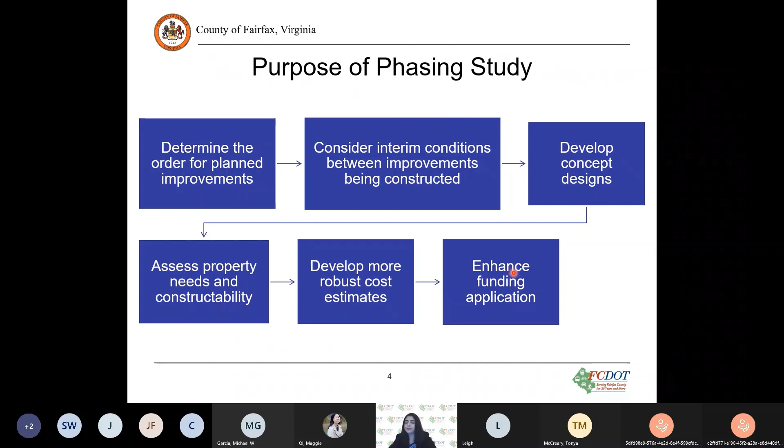The process and the steps we developed to conduct the study to determine the order of improvements include assessing and evaluating typical travel conditions in the area for vehicles, pedestrians, bicyclists, and transit users. With the pandemic and the resulting significant change in the travel pattern and volumes, we did not collect field data, but used the available data from VDOT and Arlington County from the 2018 and 2019 timeframe, and used StreetLight data to supplement the available data to conduct the existing conditions analysis. This step was completed, and the findings were presented during the first round of outreach completed in February 2021.

The next step was to develop and analyze future build conditions through travel forecast models, with 2045 being the horizon year with all the improvements, and 2030 the interim year with some of the improvements in place. We presented our initial findings with 2030 analysis with possible first two phases of construction to the public in the second round of outreach, which was conducted in November 2021, and received feedback. And we continued to develop a phasing strategy with concepts while assessing the property needs and also considering some key elements, which included shifting vehicle travel demand away from the interchange, making major travel movements easier, and also considering constructability.

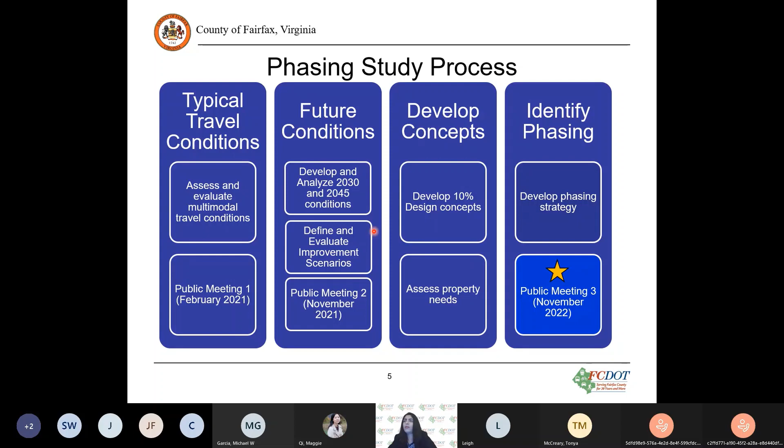There were a series of critical decisions we encountered through the study process as we developed and tested various phasing concepts, which became the building blocks that led to the next decision. Based on the different components of the recommendations in the comprehensive plan, we first identified the first phase, then adjusted the network to reflect travel demand and public feedback. Through the findings, we identified the next phase and whether the full build is necessary as recommended. Lastly, through public feedback, we assessed a 2-lane segment of the ring road where the comprehensive plan recommended a 4-lane configuration. The next elements of the presentation are built around these critical decisions made throughout the study process.

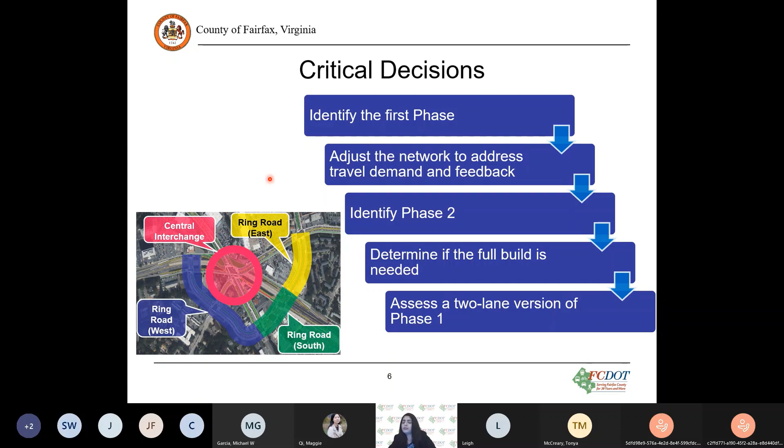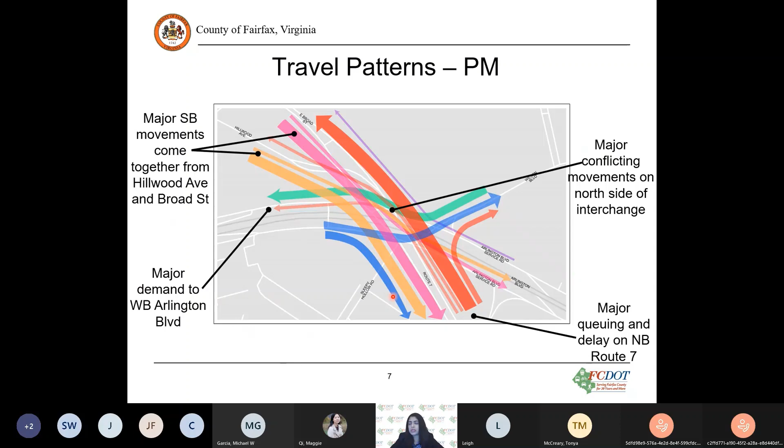Identifying a starting point, we initially looked at the travel patterns in the area, shown here for PM peak with more people traveling in the afternoon. We identified a few major movements through the interchange, in addition to the through movements along Route 7, including Route 50 eastbound traffic to Route 7 southbound and Route 50 eastbound movement to Wilson Boulevard.

Based on this travel demand, constructability, and considering previous efforts, focusing on the west side of the interchange along with potential residential impacts that would likely occur starting on the east side, we started our phasing considerations on the west side, with the ring road connecting Route 7 in the south to East Broad Street in the north, terminating at East Broad Street as our first phase, and extending the ring road between Route 7 and Route 50, simplifying the central intersection connecting Route 7, Wilson Boulevard, and Sleepy Hollow Road as our next phase.

While testing these phases, the results of the travel analysis with reconfiguring the central interchange showed that the network would experience significant congestion, largely due to the Route 50 and Wilson Boulevard traffic being diverted to Sleepy Hollow Road and the Ring Road with multiple turns.

At the same time, City of Falls Church provided feedback that they did not want the Ring Road to enter the city, impacting their property, and also wanted to avoid more traffic shifts to Hillwood Avenue. Considering this feedback, we removed a portion of the ring road north of Route 50, while making a decision to test a scenario with the Route 50 and Wilson Boulevard connection where the travel demand is high.

We also looked at potentially relocating the transit center, considering the issues with the grade at the current location, along with adjustments to the ramps with this new ring road.

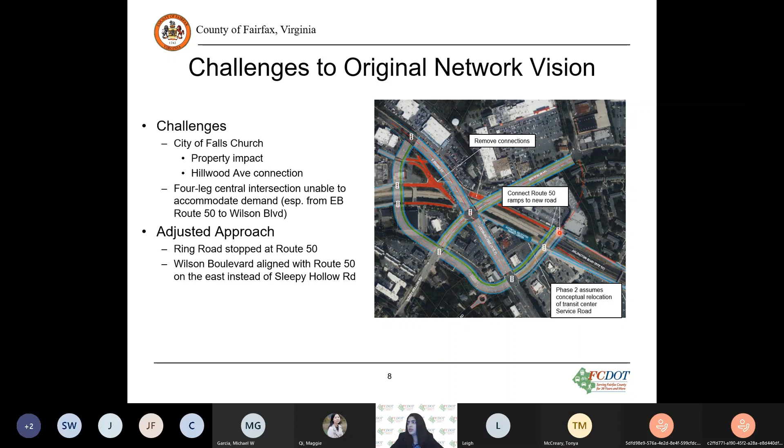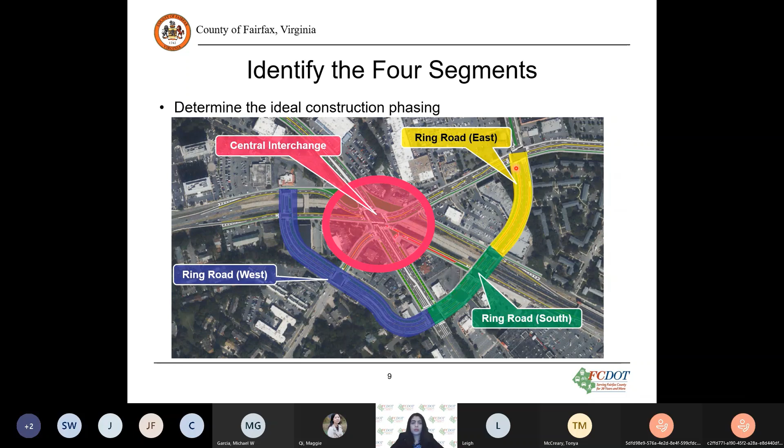Through a significant amount of analysis and feedback, the early phasing was relatively clear that phasing should start on the west side, but the phasing of the next set of improvements was not yet clear. The independent segments to consider were identified as the ring road in the south between Route 7 and Route 50, the ring road extension in the east between Route 50 and Wilson Boulevard, and reconfiguring the central interchange.

This is the revised layout of phase 1, with the ring road between Route 50 and Route 7, with the northern portion of the ring road removed based on feedback from City of Falls Church. This segment includes 2 travel lanes in each direction, a 2-way cycle track on the east side, and sidewalk on both sides of the roadway with landscape panels.

And with the shift of the bridge over Route 50 a little to the west, and adjusted ramps to and from Route 50, the analysis results showed improvement in operations, adding this segment to the network as many movements centered on the interchange area shifted to the ring road, also significantly improving delays along Route 7. Outside the central interchange area, the intersections operate with reduced delays, and this segment was advanced as part of the recently submitted smart scale application for VDOT funds.

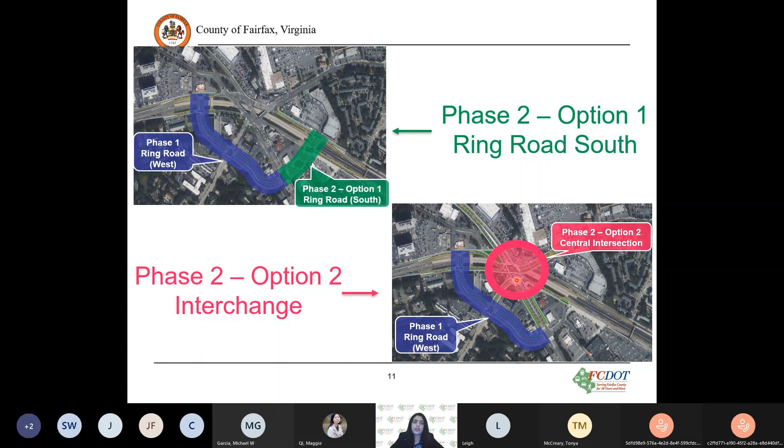To test the next phase, we looked at either extending the ring road on the south side, referred to as phase 2, option 1, or reconfiguring the central interchange to connect Wilson to Route 50 ramps and Route 7, referred to as phase 2, option 2. I'll be going over these concepts in the next few slides.

Phase 2, option 1, will include extending the ring road on the south side with bicycle and pedestrian facilities, along with an exclusive BRT lane for bus rapid transit, with possible extension to Roosevelt Boulevard in next phases to connect with East Falls Church Metro Station. This segment will also include new and adjusted ramps to and from Route 50. This phase, with the ring road extension, continued to help improve network performance, particularly at the central interchange, with more traffic shifting away from it.

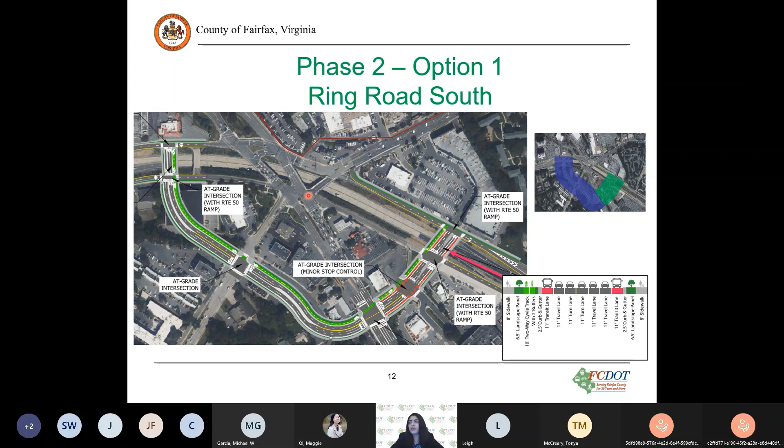As part of making a determination for the second phase, we looked at improving the central interchange area instead of the east side extension, which is our phase 2, option 2. This includes the connection between Wilson Boulevard, Route 50 ramps, and Route 7, based on the failing operations with Sleepy Hollow and Wilson connection as recommended in the comprehensive plan.

With this option of the interchange reconfiguration, along with phase 1, network performance degraded. A few reasons contribute to this: reconfiguring this intersection required additional signal phases and movements, like left turns from northbound Route 7 to the Route 50 westbound on-ramp, and from the Route 50 eastbound off-ramp to northbound Route 7. Also, removing the Hillwood connection from the interchange caused some impacts.

Another issue is the lack of connection for westbound Route 50 traffic to Route 7. This forces westbound Route 50 traffic to use Patrick Henry Drive south of this location to get onto Route 7, creating delays. So in general, congestion at this intersection spreads to adjacent signals, degrading network performance.

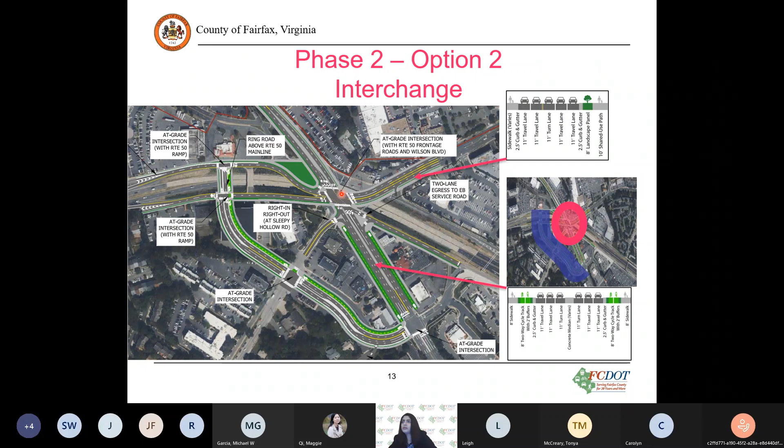Comparing the two options, 1 and 2, for phase 2, based on the analysis results, we saw that the ring road extension to the east side to Route 50 as the next phase helps the network become highly functional, enabling movements to shift away from the interchange and also facilitating constructability.

Comparing the options, we concluded that the recommended construction order for the first three phases is: the ring road on the west side between Route 50 and Route 7, followed by the ring road on the south side connecting Route 7 and Route 50, and third, reconfiguring the central interchange connecting Wilson to Route 50 and Route 7.

At this point, the missing piece from the comprehensive plan recommendations was the extension of the ring road from Route 50 connecting to the Wilson and Roosevelt Boulevard intersection. To analyze this segment, we considered 2045 volumes and analysis, starting by developing a set of baseline conditions. The baseline included completion of phases 1, 2, and 3, plus implementation of BRT in the area. The county comprehensive plan includes exclusive BRT along Route 7 and the ring road from Route 7 to Wilson Boulevard.

The BRT repurposes a travel lane on Route 7 into exclusive transit lanes, so there are two transit lanes and four through lanes. This phase 4 connection makes the last set of improvements proposed in the comprehensive plan, enabling better network performance across all modes. This phase showed modest improvements with analysis. Along Route 7, there are some delays experienced from Castle Road to Patrick Henry Drive, with a reduced number of through lanes from six to four to provide bus lanes for BRT.

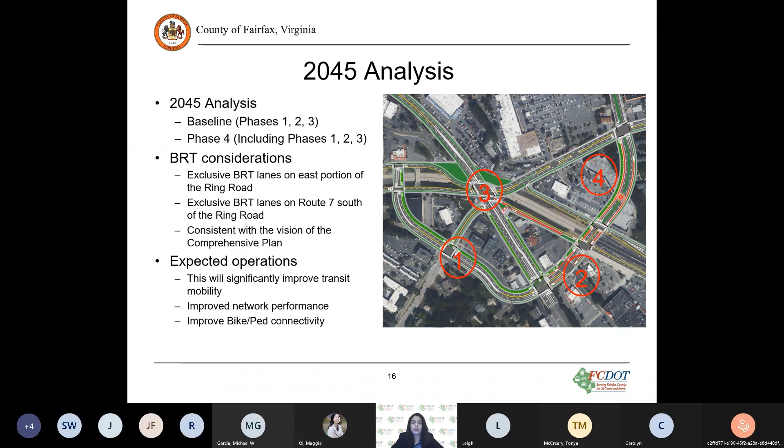This segment in general completes the network for accessibility, meeting active transportation needs and providing exclusive transit access. But considering the right-of-way impacts and this phase being such a long-term improvement, we will be evaluating the need for this segment as part of NVTC's Envision Route 7 BRT effort.

Here's a brief overview of the Envision Route 7 BRT study being conducted by the Northern Virginia Transportation Commission and how it's being integrated into our Seven Corners study. As high quality bus rapid transit is proposed from Tysons to Mark Center, the project envisions repurposing a travel lane to transit, or using an already programmed widening of Route 7 for transit lanes instead of vehicle lanes. Curb-running transit is proposed through Falls Church, shifting away from Route 7 briefly near Seven Corners to connect to East Falls Church Metro Station and returning to Route 7 north of Seven Corners.

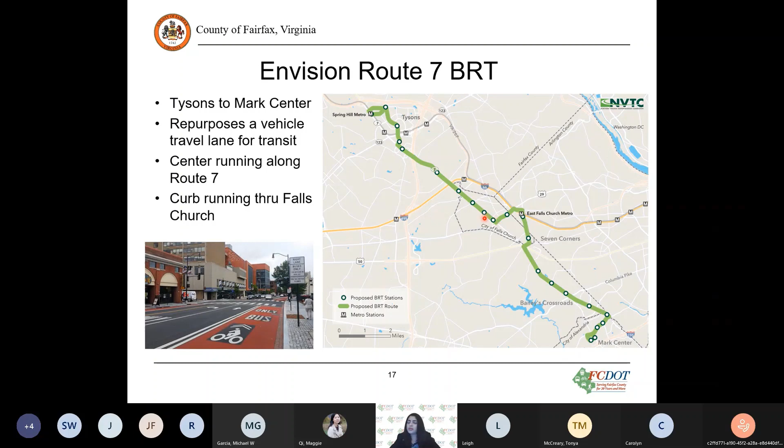Back to the phasing study, this shows the bicycle and pedestrian connections and how all the phases, through the ring road and central intersection realignment, will help prioritize these planned facilities in the interchange area, while improving access to adjacent facilities the county plans in the area, coming with redevelopment along Patrick Henry Drive, Willston Drive, John Marshall Drive, Wilson Boulevard, and Sleepy Hollow Road. These facilities will create a bicycle and pedestrian network enabling residents to access services and opportunities in the area.

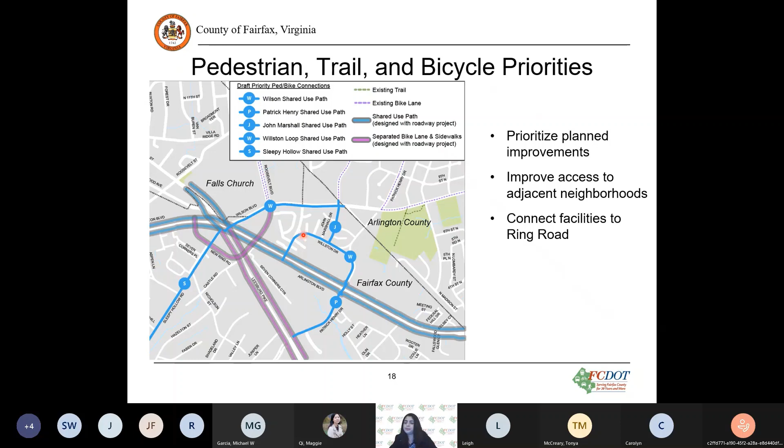As part of the feedback we received from the public during the previous round, we were asked about reducing the footprint of the ring road and making it a two-lane segment. So we tested this two-lane configuration for our phase 1 in 2030 for the ring road between Route 50 westbound on-ramp and Route 7, but with one travel lane in each direction.

Analysis indicated that delay is somewhat high along the ring road, but the network more broadly fails because travel demand cannot move as quickly as needed between Route 7 and Route 50 along the ring road. Queue spillback from the ring road on Route 7 to Patrick Henry Drive impacts other intersections, leading to exceptionally high network delay.

In conclusion, considering the comprehensive plan recommendations and based on our analysis, we are proposing this order of improvements: the ring road on the west as our first phase between Route 50 and Route 7, followed by the south extension between Route 7 and Route 50, and phase 3 reconfiguring the central interchange and the ring road connection to Wilson Boulevard as the last phase. We are proposing the ring road to have 4 lanes, not 2 lanes.

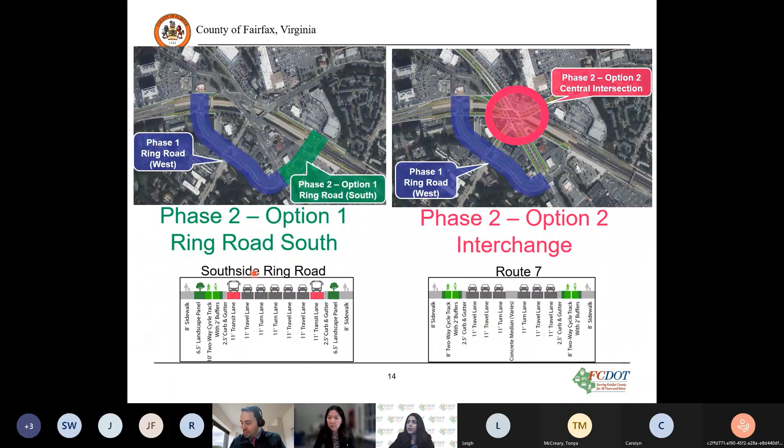Okay, thank you. Next question: what are the boundaries of the widening of Route 50? So based on the previous study, widening of Route 50 was recommended, but currently, other than the central interchange area, Route 50 is already widened to 6 lanes. For the central interchange area, we are looking to consider the ramps as the 5th and 6th lane, and we are not widening within the central interchange area.

Thank you, Landisa. Next question: what specific changes have you made in response to public suggestions? We received feedback about removing the northern portion of the ring road, so we took that feedback and removed the connection from Route 50 to East Broad Street, ending the ring road here at Route 50. We also tested a 2-lane configuration versus the 4-lane configuration as recommended in the comprehensive plan. We also received feedback that the visuals were not very clear during the last 2 rounds of public outreach, so we developed more detailed visualizations.

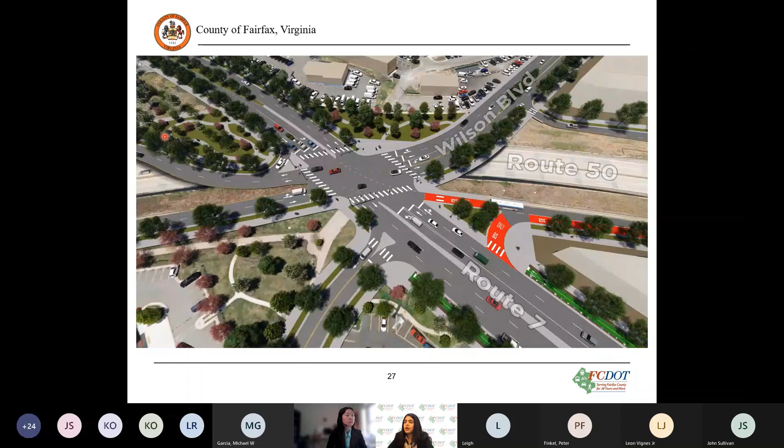Thank you. Next question: could you please share more details about the latest design with respect to Hillwood Avenue? Let me share some of the visualizations here. So we are looking at disconnecting Hillwood Avenue from the interchange and making it a cul-de-sac around here. Traffic coming along Route 7 can continue to access the interchange along Route 7. For Hillwood, the connection would end here.

Okay. Thank you. So the next question: will the various perspectives presented here be included in the posting planned for next week? I'm sorry, can you repeat that question? Sure, will the various perspectives presented here be included in the posting planned for next week?

I'm not entirely sure about posting. Yes, all this information will be posted on our webpage. The slides from this presentation along with this recording, the video, will be available.

Okay, thank you. The next question: I appreciate you looking at two travel lanes for the west side of Ring Road, but am disappointed you decided not to go that route. Can you explain at what time of day and for how long there is delay and spillback you mentioned? What level of service are you considering for this portion of the Ring Road, level of service E or D?

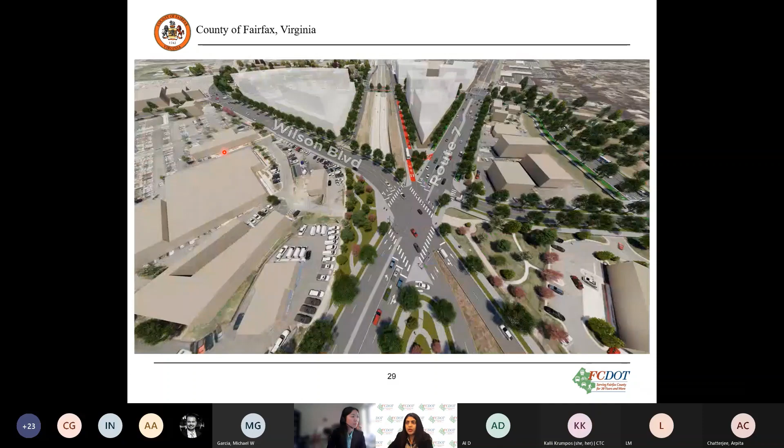So in comparing the 2-lane configuration versus the 4-lane configuration, we noticed that the intersections are failing with level of service F. For the 2-lane configuration, there are 8 intersections with level of service F, versus 4 intersections with the 4-lane configuration. We have conducted the analysis for AM peak hours and PM peak hours.

Okay, and as I mentioned, slowing movements along the Ring Road by reducing the footprint impacts the operations for the network as a whole, creating congestion everywhere else, with traffic not being able to move through the segment.

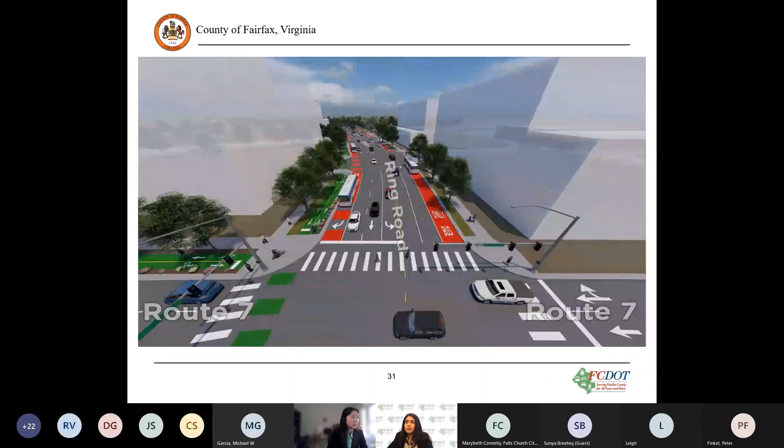Thank you. Next question: there are tremendous elevation changes between all the roads concerned, but the designs are very 2D, and it's hard to visualize the elevations. Are there more visualizations showing the elevations?

We do not have more visualizations, but as I mentioned, during the next phase we will have more detailed designs that we can share.

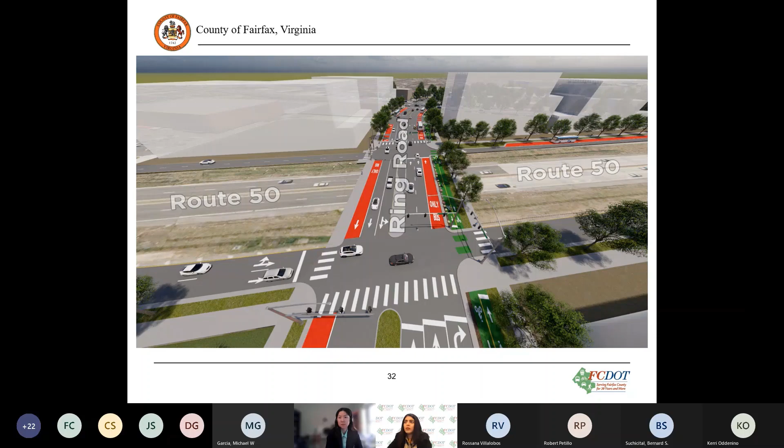Okay. Thank you. Next question. Can you speak more about the 2-lanes versus 4-lanes ring road analysis? So, okay, let me get to that. Yeah, it's 2-lane versus 4-lane ring road analysis.

So we tested this segment again through analysis by reducing the footprint, and we saw that multiple intersections fail when we reduce the footprint. Like I mentioned before, we had 4 intersections failing with the 4-lane segment, versus with the 2-lane segment there are more intersections failing; the number doubled to 8 intersections with the 2 lanes.

So the traffic moves slowly with the reduced footprint, and it cannot accommodate the demand, which results in congestion around the other intersections adjacent to this. So the network in general fails with reducing the footprint and creates more congestion in the area.

Okay, thank you. Next question. Assuming a sunny day, what would the earliest date be for start of construction? That entirely depends on the availability of funding. We have applied for funding, and we are continuing to apply for funding. And as and when we receive the funds, we can move ahead with the next phases.

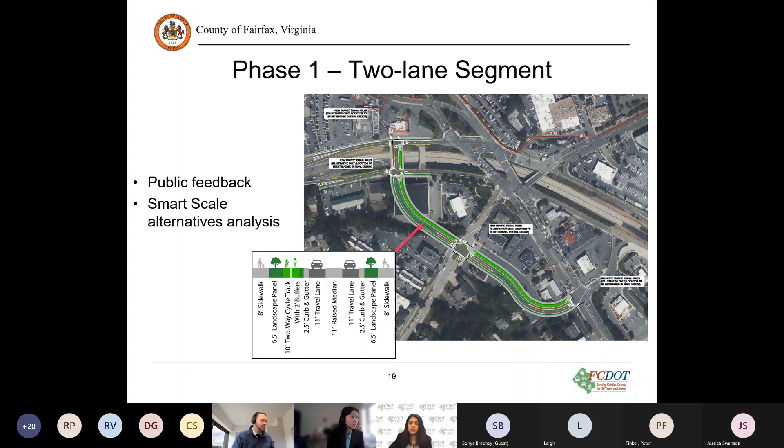If the ring road were moved a bit to the west of Piston's restaurant, could it not connect back to Route 7, with Hillwood becoming one way and connecting to the outer counterclockwise lanes? Do you want me to repeat the question? Yes, please. Sure. If the ring road were moved a bit to the west of Piston's restaurant, could it not connect back to Route 7, with Hillwood becoming one way and connecting to the outer, which is counterclockwise lanes?

So the feedback that we received was for the ring road connection to be removed with East Broad Street, because the ring road is going over the property of this fitness center, and the city did not want that property to be impacted. So we pulled it back and connected it with Route 50 here. That's the reason we ended it here.

Okay. I'll also point out that the design has changed slightly. In the comprehensive plan, we had it a little bit more tight and closer to the interchange, and through the study that Nanditha is leading, we found that we actually had to move the ring road out a little bit more to create enough intersection spacing. So that's why you see a slight design change. Okay. Thank you, Mike and Nanditha.

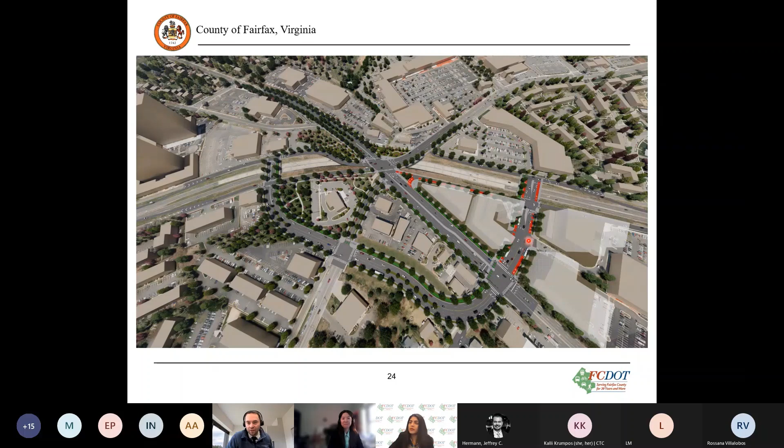Maggie. So next question. Are any portions of Route 7 asphalt being torn up and repurposed, since the ring road is supposed to help distribute the traffic of Route 7? Or is the Route 7 footprint to remain the same? So the Route 7, the comprehensive plan envisions 6 lanes along Route 7, but the 5th and 6th lanes will be repurposed to BRT lanes.

So Route 7 footprint will not remain the same, right, as part of the future projects? No, the footprint will remain the same. It is envisioned to be 6 lanes, but the 5th and 6th lanes would be repurposed to the transit lanes. Got it. Thank you.

Next question. Would there be LPIs for people walking and biking? Leading pedestrian intervals. Yeah, we plan to provide that, but we will be looking at that more closely during the next phases of analysis. Okay, thank you.